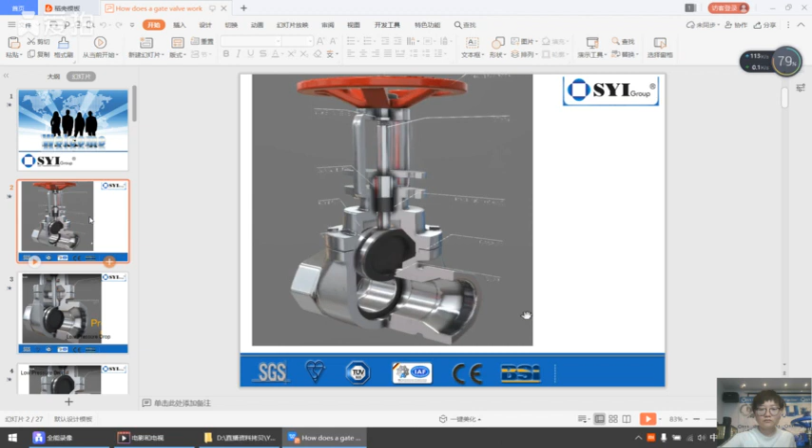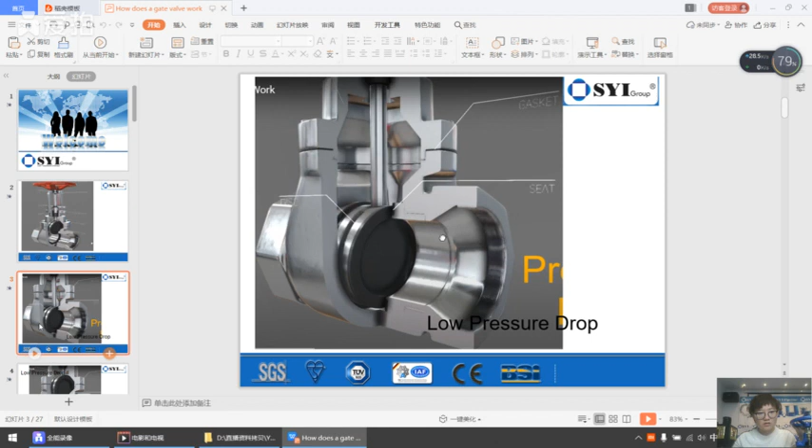We can also have a look here. This is a gate valve, and now it's in the closed position. When we move up, it is in the open position.

We can see here, when the valve is fully opened, there is little resistance to flow passing through the valve. This is very good because it means we're going to have a very low pressure drop. As the fluid or gas flows through the valve, it encounters very little resistance and will have a correspondingly low pressure drop.

Gate valves are normally used in line, meaning they're used just to pass flow through, but occasionally you might need to close the valve and isolate the system, and that is what a gate valve is for. So a gate valve is only used for open and close. This is just one function for the gate valve.

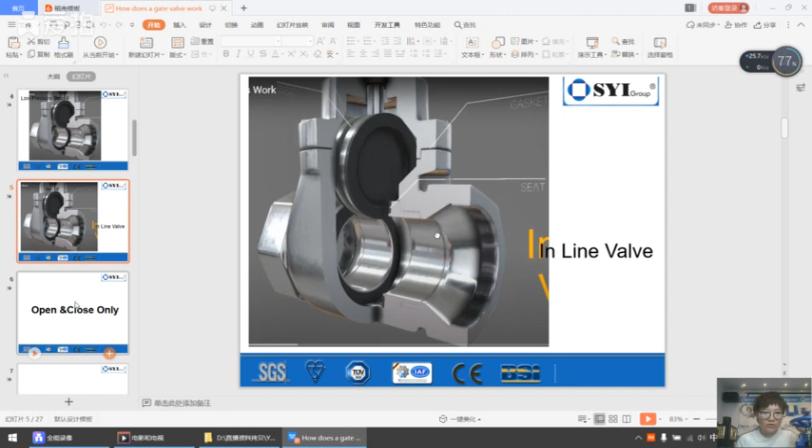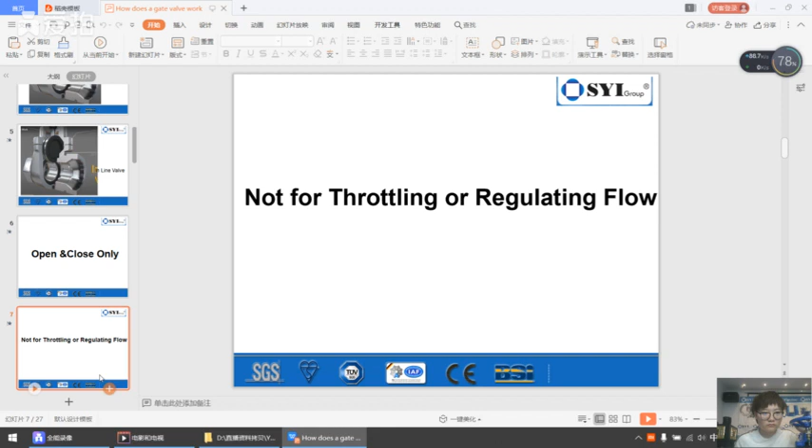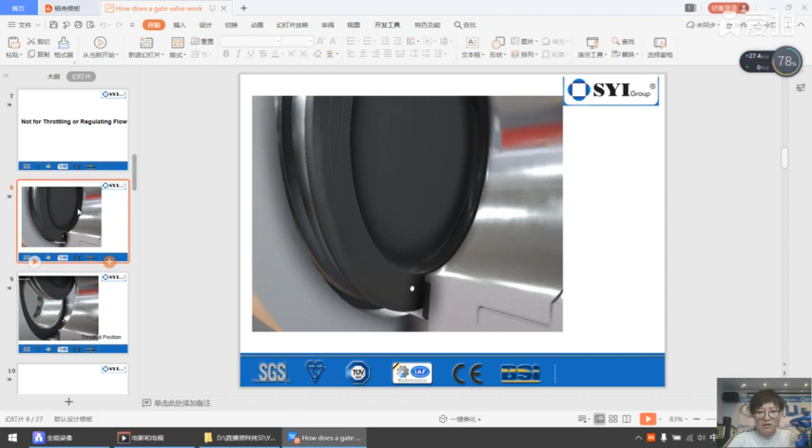It is not used for throttling or regulating the flow, and I'll show you why. Have a look here. You can see the disc is pressed against the seat. Now it's only half open, so it's in the throttled position.

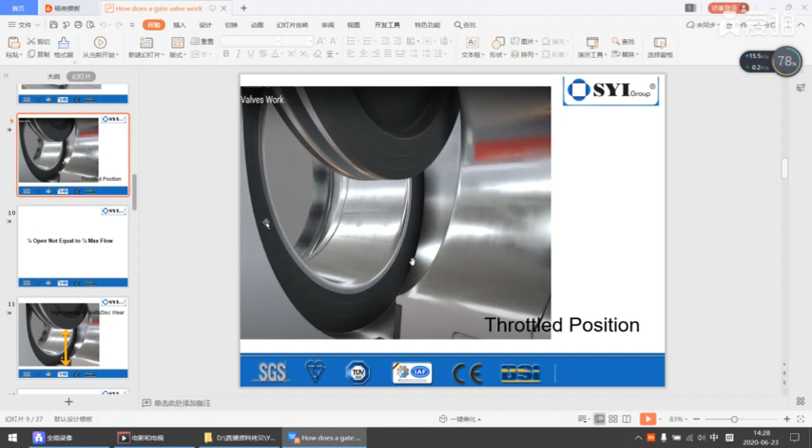The problem with this is that firstly, the amount of flow through the valve is not proportional to the amount the gate valve has traveled. So this disc section here had traveled up and it looked like approximately halfway, but the flow through the valve is not going to be half of the max flow capacity. The flow through the valve is not linear or proportional to the amount the valve is open.

This means that when you actually open the valve halfway, you're going to get a lot of flow between the disc and the body here, and this is going to be proportionally quite a large amount of flow with a high velocity. This high velocity often leads to seat and disc wear.

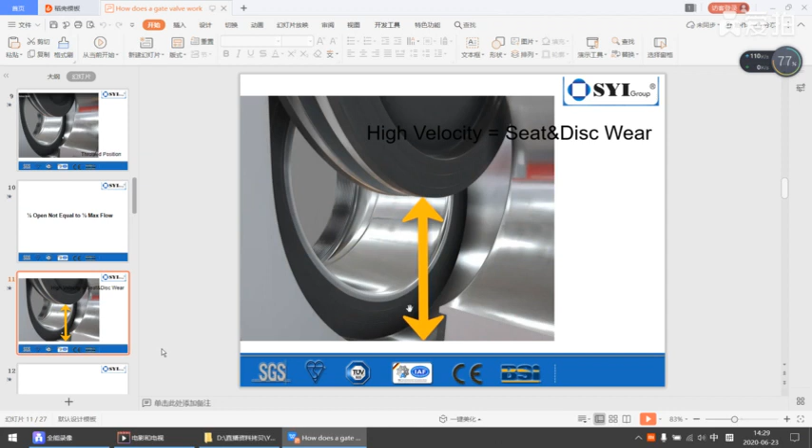The other problem from the high velocity is the turbulence. As the flow passes through this small gap between disc and body, there is a lot of turbulence, and this also creates a large pressure drop, which again is what you don't want—this is resistance to flow. So a gate valve is not very well suited to throttling; in fact, they should either be fully opened or fully closed.

We are down here, we can have a quick look at the seat. The seat, this area, is normally either part of the body, such as a flat machined surface, or a seat ring, and seat rings are usually metal rings.

The advantage with this seat ring is that if the seat becomes worn, you can just change the seat ring. So seat rings make it easier to repair a valve, such as repairing the seat if it's leaking, by simply swapping the ring out. In order for the valve to sit correctly, we need both the disc and seat to be machined flat so that they can press against each other and form a seal.

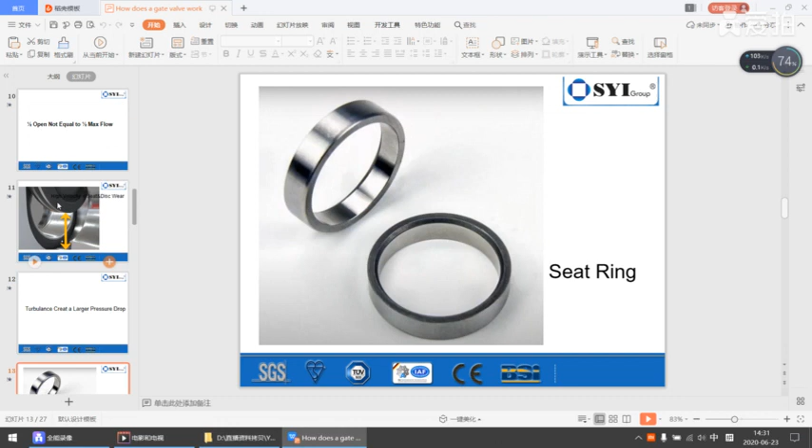So we already know that we can use seat rings and replace them if the seat surface becomes damaged, but that still leaves the disc. If we move up, we can actually see the stem passing all the way through the valve and through the sealing arrangement, and up through the hand wheel.

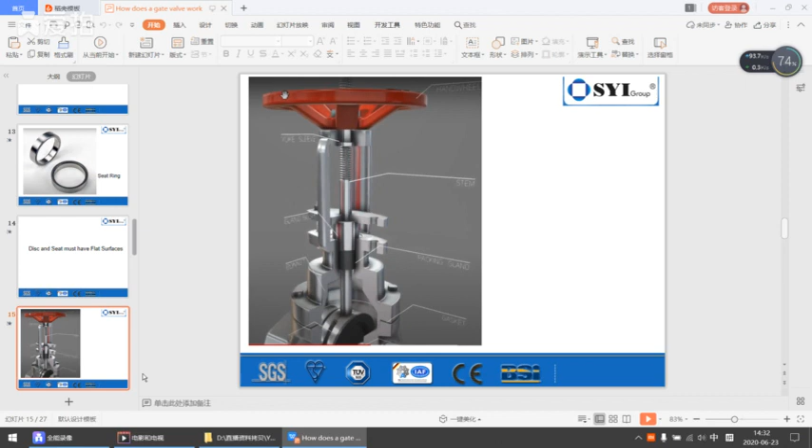This is interesting because if we watch, we can actually see the stem rising out of the top of the hand wheel and dropping back down again. So it's going to keep rising up and dropping back down.

This type of design is what we refer to as a rising stem gate valve. It makes it really easy to see the position the valve is in, because the stem is just going to pop out of the top. In order to achieve this, what we've actually done is fix the stem.

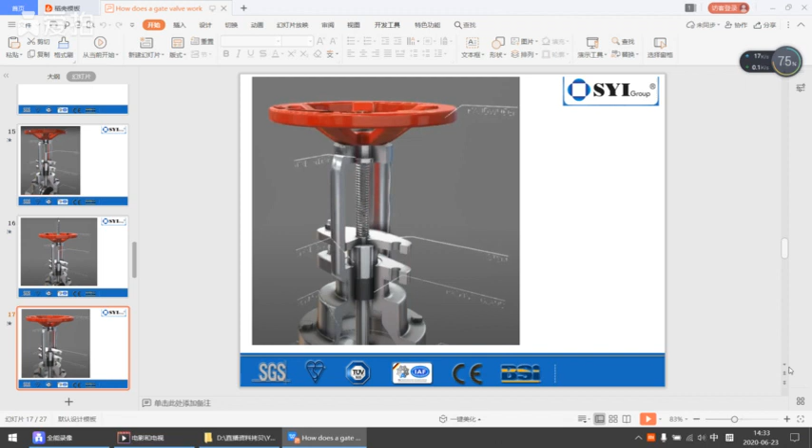That means that as we rotate the handle wheel, the stem is going to be pulled upward and it's going to pull the disc up. This is a slightly different design to what we call a non-rising stem gate valve. There are two main designs: rising stem, non-rising stem. As I said earlier, it's easy to see if the valve is open or closed.

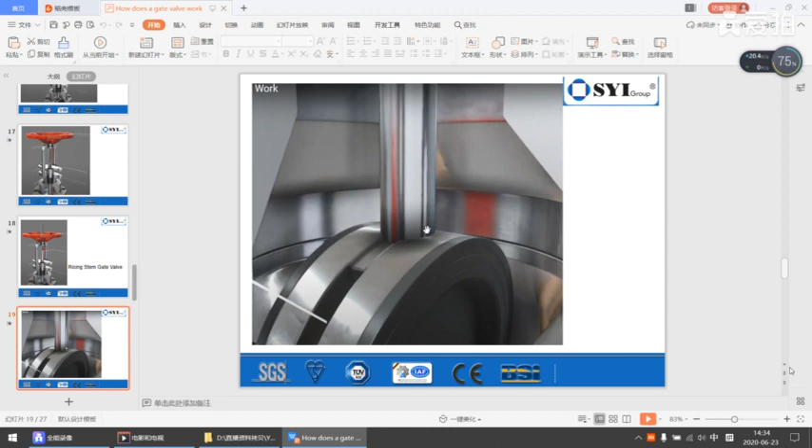The downside is that sometimes you will carry a bit of dirt on the stem, carrying out the dirty stem, and when you close the valve, the dirt will pass through the packing or potentially damage the packing, which will damage the seal, and then you may get a leak. So contamination is a potential problem with a rising stem gate valve. But the big benefit is that we can actually see visually if the valve is fully opened or fully closed.

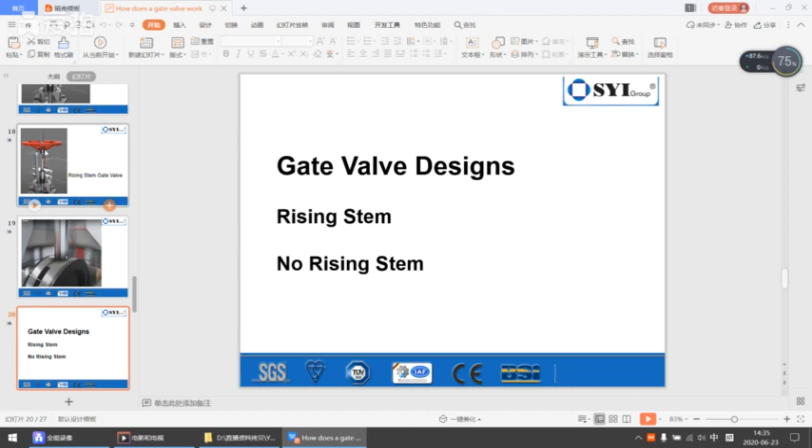If we just take a look now at a non-rising type of gate valve, you can see this is a non-rising type gate valve. I'll show you the parts. We've got the handle wheel, the bonnet, the small gaskets for sealing, the stem,

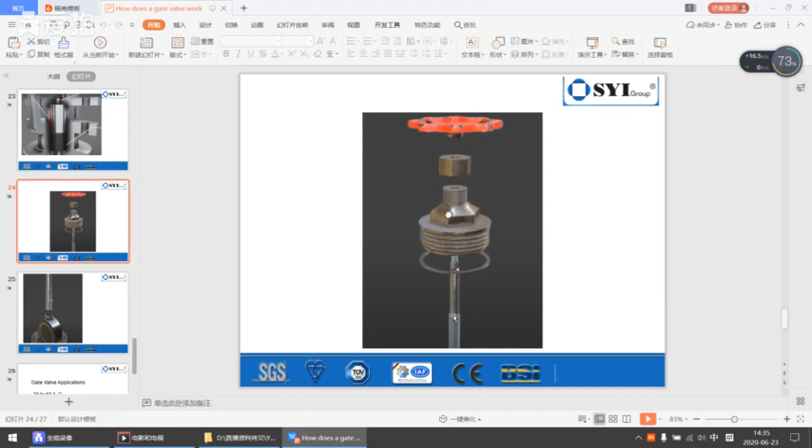and we can see the stem in comparison to the other design we looked at has a thread going all the way down. The reason we have this thread going all the way down is because as we open the valve, the thread goes through into the disc, into the section here. It's going to go all the way through the disc. As it screws into the disc, it's going to be pulled up the stem.

As it pulls up the stem, we are going to open the valve. So rather than having a rising stem, we're going to have a non-rising stem because this is just going to turn, and as it turns the disc will move from here, the bottom part of the stem, and it's going to be dragged upward until it reaches the bottom of the disc.

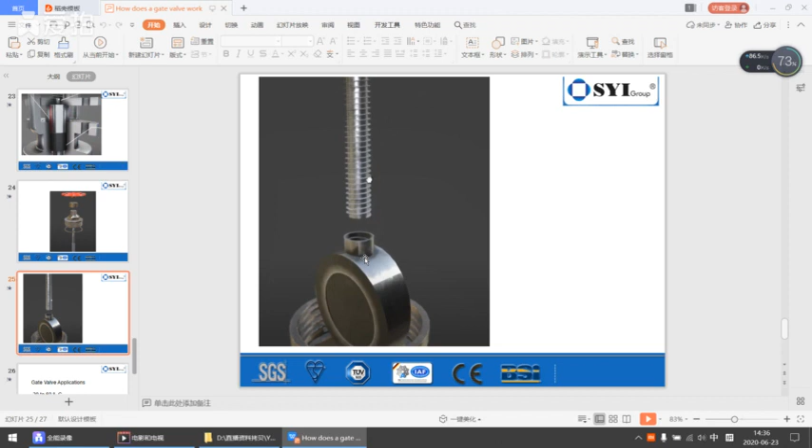The typical service temperature is going to be between about -20 to 60 degrees Celsius. Pressure up to maximally 16 bar. These valves are not suitable for very high pressure because you are actually going to blow the packing out or cause the packing to leak. So 16 bar would be the max service pressure, and for flow rates, you are looking at anything between 5 to 20 meters per second, depending on if the flow medium is liquid or gas.

For liquid, the flow rate is actually going to be less, so you are looking in the 5 meters max per second range, and for gas, you are looking up to maybe 20 meters per second. Okay, this is today's episode about how a gate valve works, and we still have 20 minutes, so let's

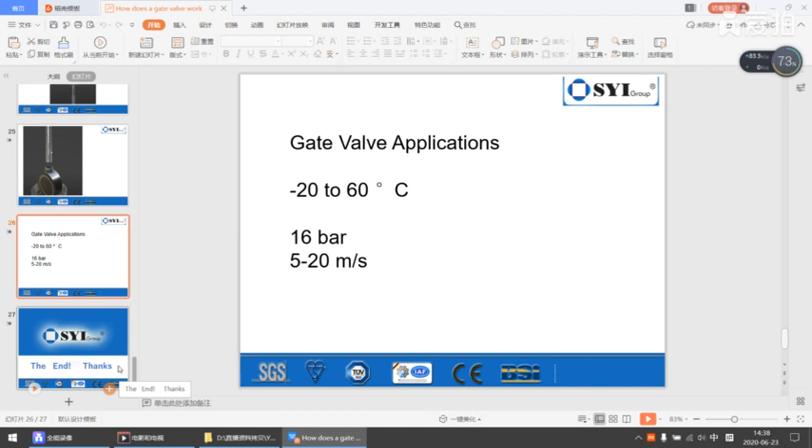Let's have a look at our catalog of valves. SYI supplies gate valves, check valves, butterfly valves, Y strainers, fire hydrants, and a full range of pipeline products and accessories.

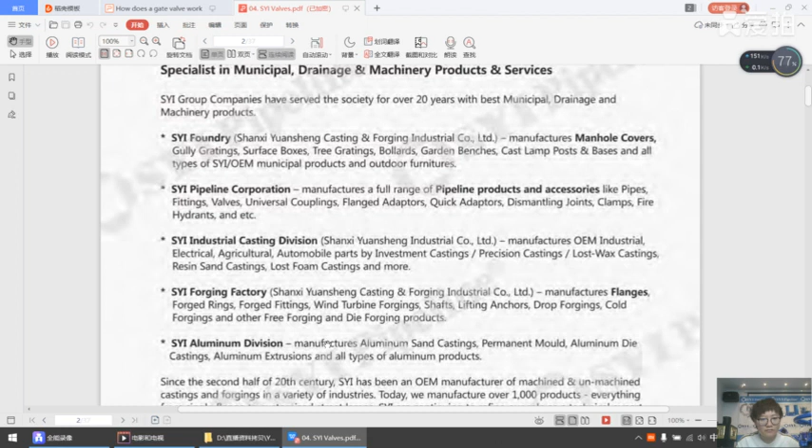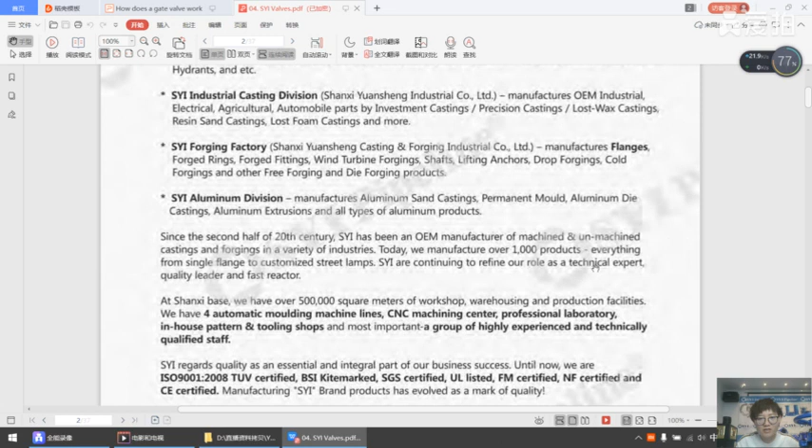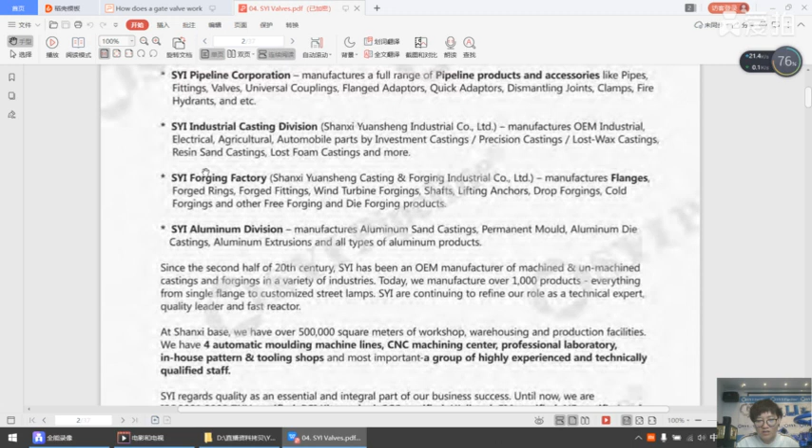We have foundries and machine plants, and over 500,000 square meters of workshop, warehouse, and production facility. You can see here we have 4 automatic molding machine lines, CNC machine centers, professional laboratory, in-house pattern tooling shops, and most importantly, a group of highly experienced and technically qualified staff. Our colleague introduced our technicians these days. If you are interested in that episode, please go back and click our link.

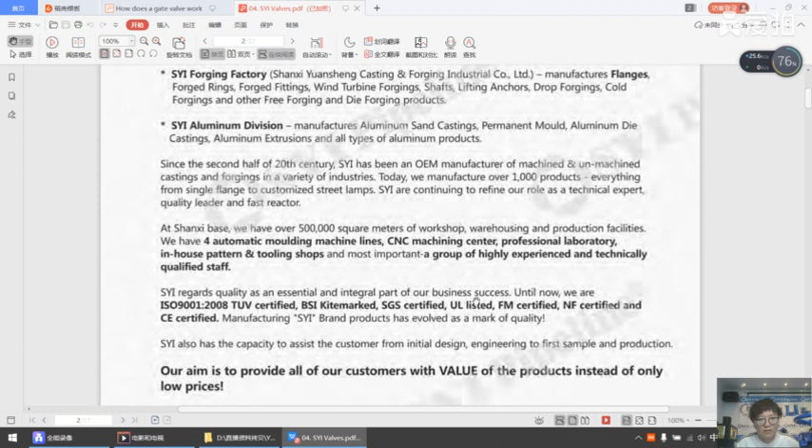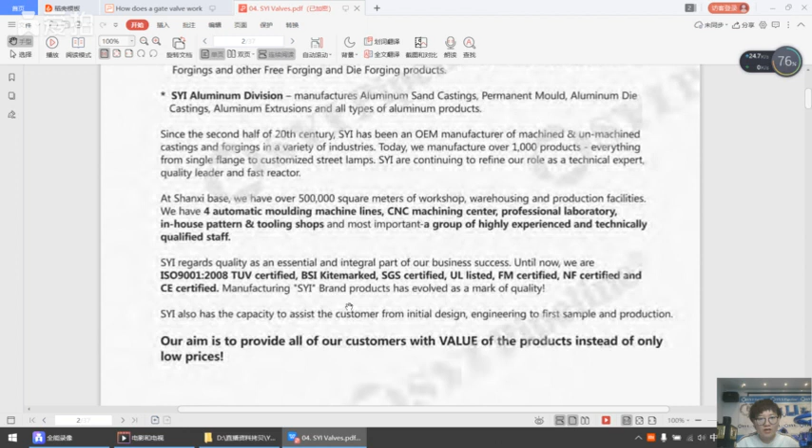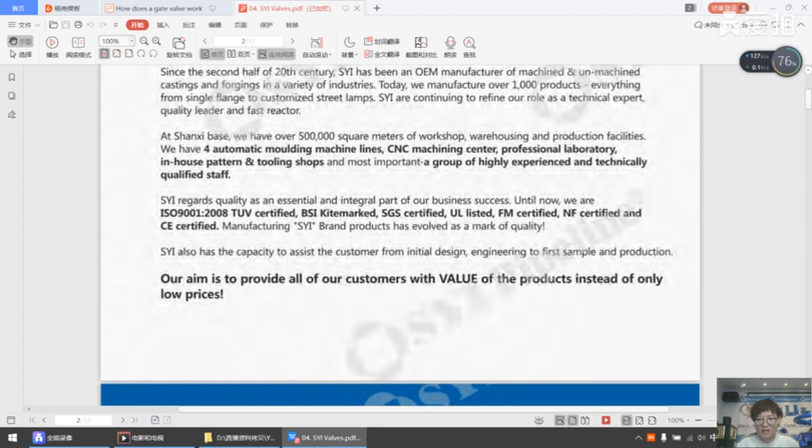Regarding quality, we have these certificates: ISO 9001, SGS certificate, Kitemark, BSI Kitemark, C and F, like that. So in SYI, we can supply one-stop service to you. This is our certificate.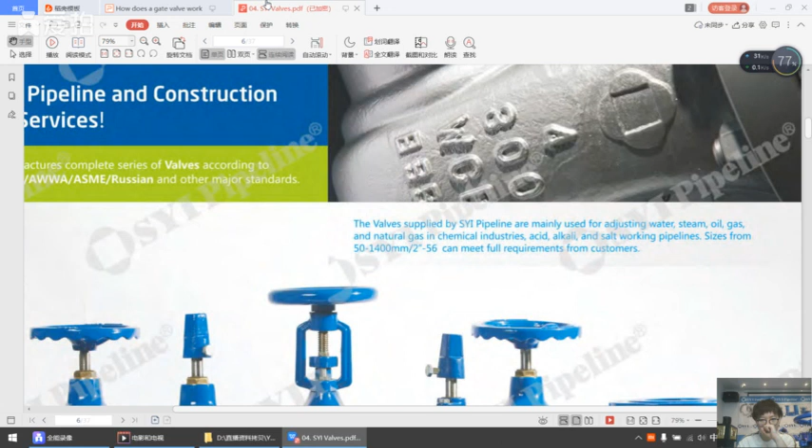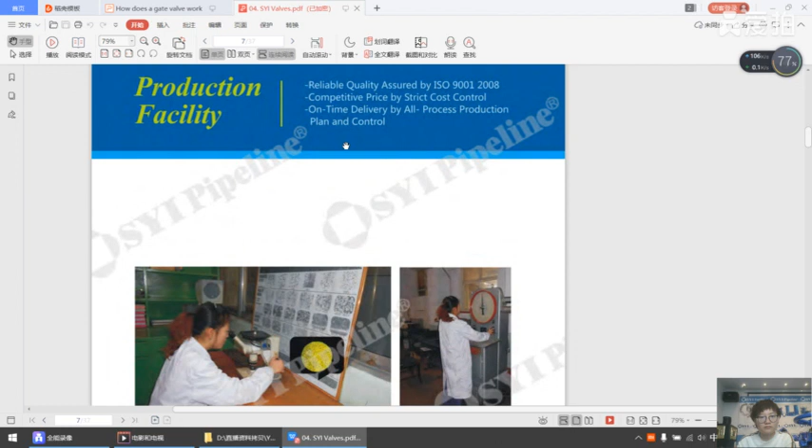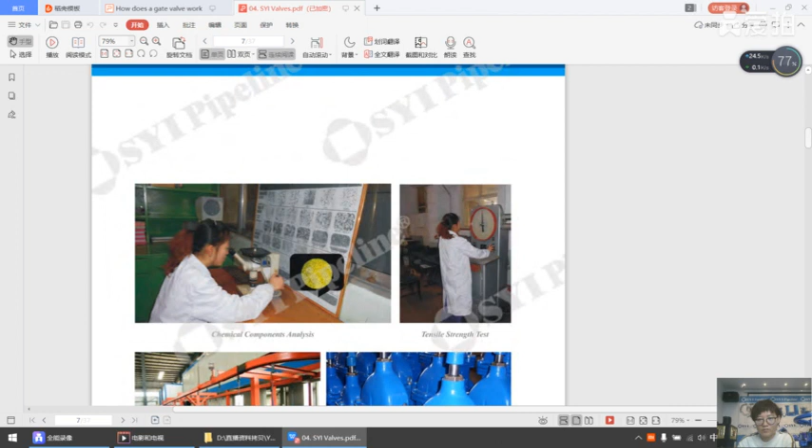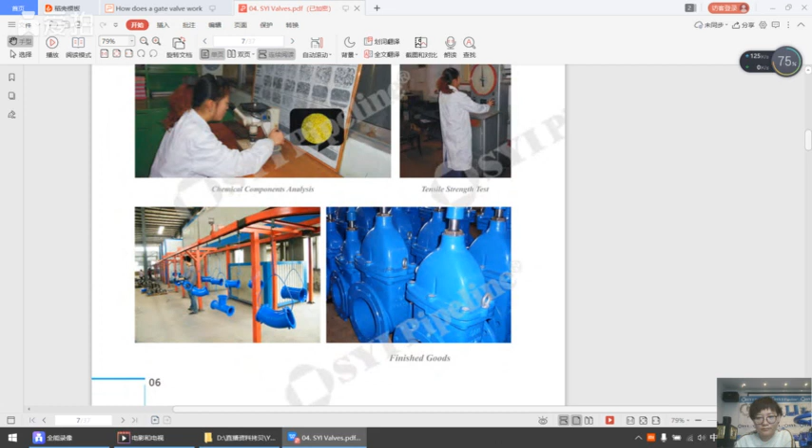This is our production facility. Because of the facility, we ensure our quality can be guaranteed. This is chemical components analysis, tensile strength test. This is you can have a look here. This is finished goods surface. It's smooth, the color is bright.

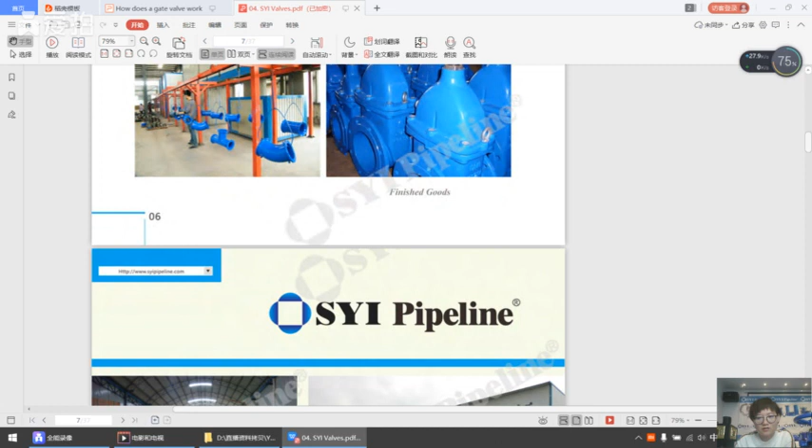This is our painting area in one of our shops. This is our workshop. This is one of our workshops.

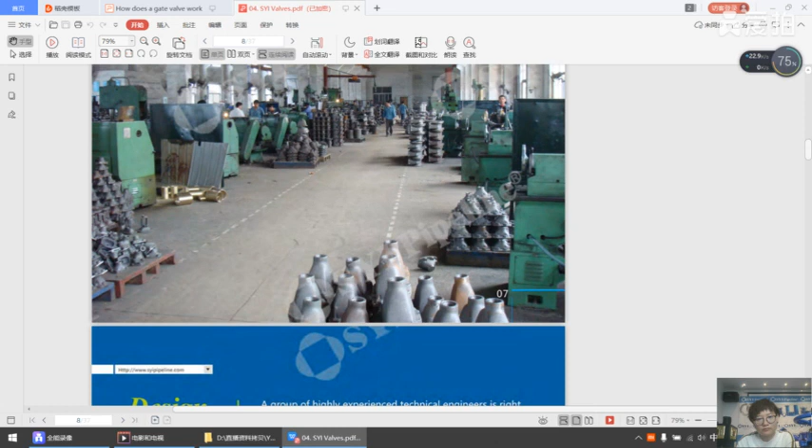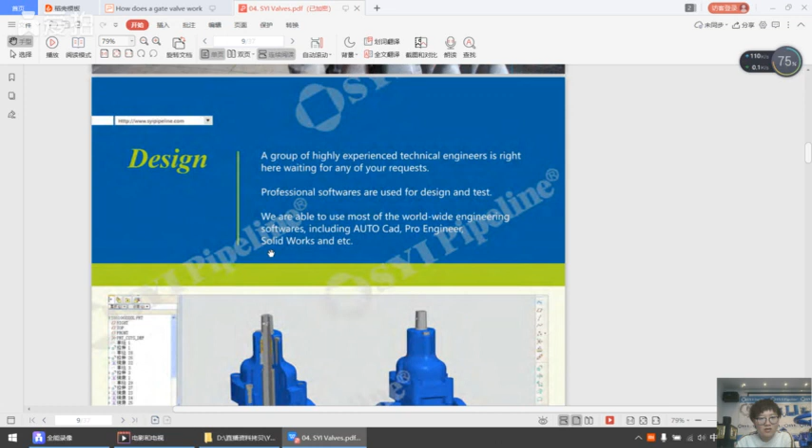Of course, we can design any valves for our clients because we have a group of highly experienced technical engineers. So we are able to use most of the worldwide engineering software to design the valve for you. So firstly, we are talking about the gate valve.

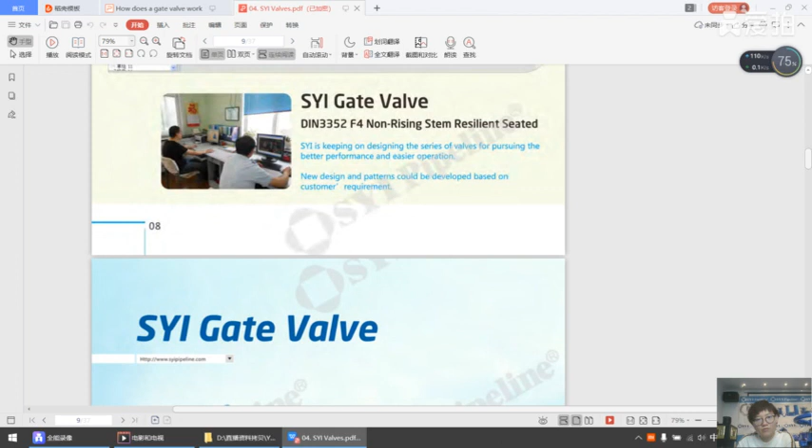This is the non-rising stem resilient seated gate valve. It's the most common gate valve. This is rising stem resilient seated gate valve.

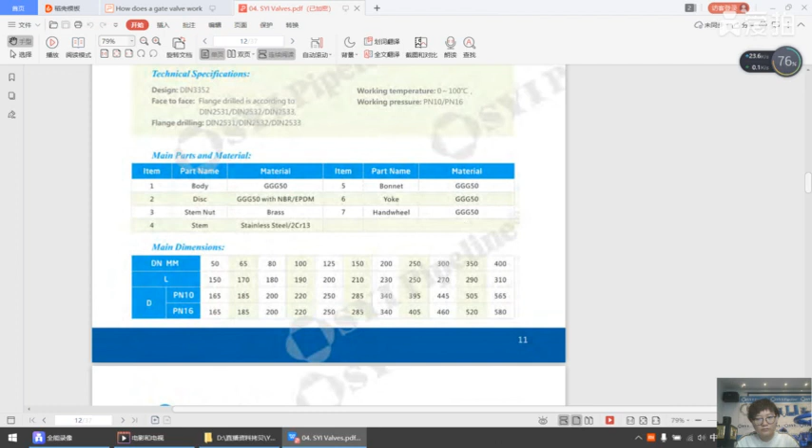This material is ductile iron GGG50. Disc is the same, bonnet the same. Also we can supply the material of carbon steel, stainless steel. This is a rising stem metal seated gate valve. Here the seat, disc and the seat here are made of metal. On a resilient seat gate valve, the disc and the body here, seat here, are made of rubber.

Have a look at this sample. This is a resilient seated gate valve. Have a look here, the disc outside is made of rubber. So this is resilient seated gate valve.

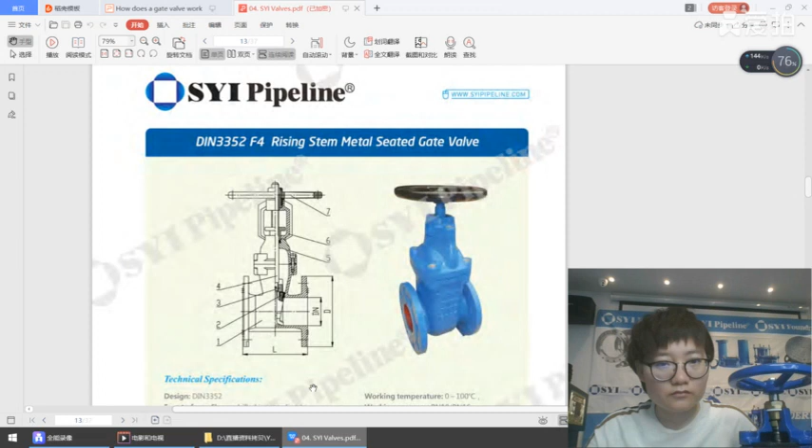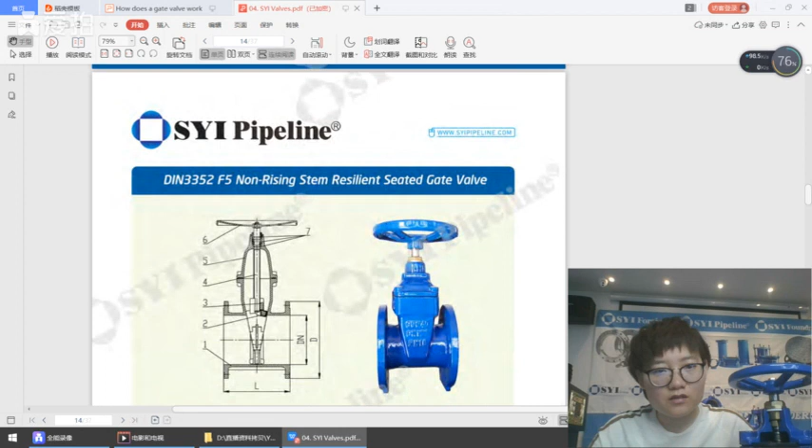And another type is a metal seated gate valve. This is an F5 non-rising resilient seated gate valve. So this sample is non-rising stem gate valve, because when we open and close the valve, we cannot see if the valve is opening or closing. But if it's a rising stem gate valve, you can actually visually see when the gate valve is open and when the gate valve is closed. So it's a different design.

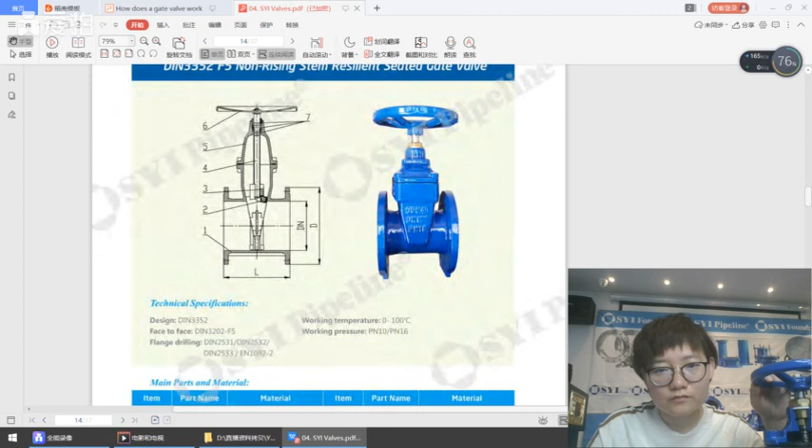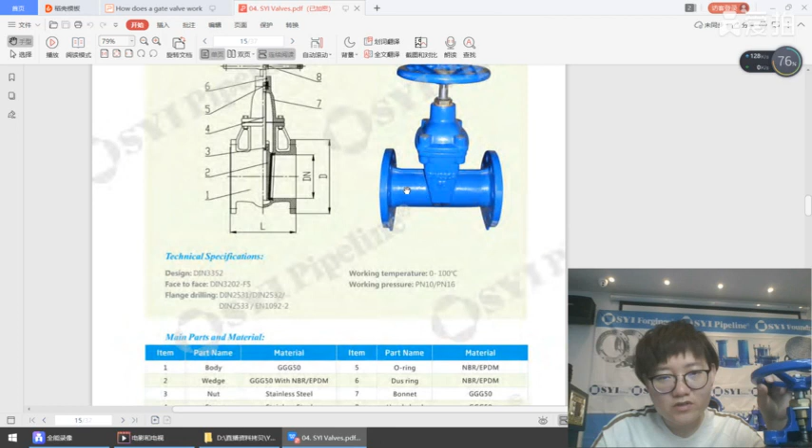Let's go on. It's non-rising stem resilient seated gate valve, F5. And the difference between F4 and F5 is this length. For F4, the length L is shorter than F5.

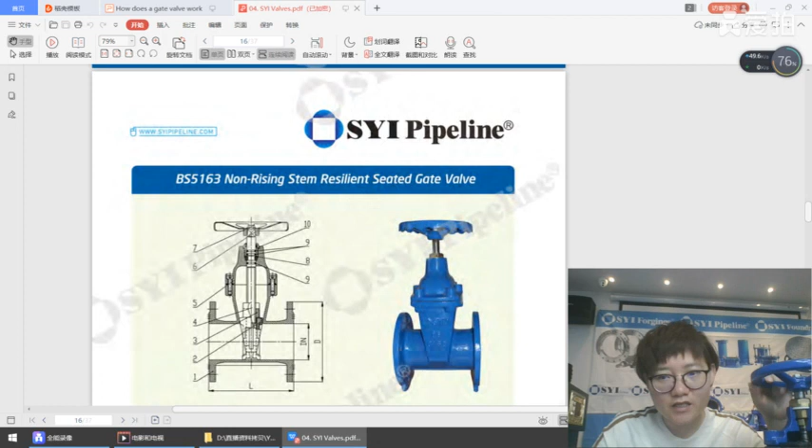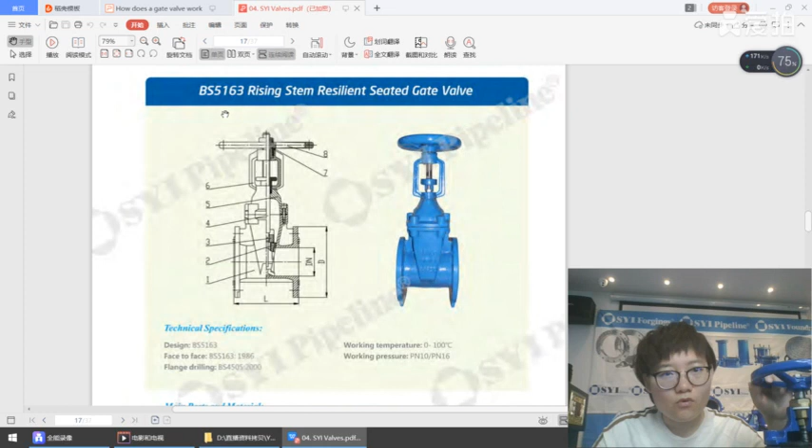This is the British Standard BS5163 non-rising stem resilient seated gate valve. This is the BS5163 rising stem resilient seated gate valve.

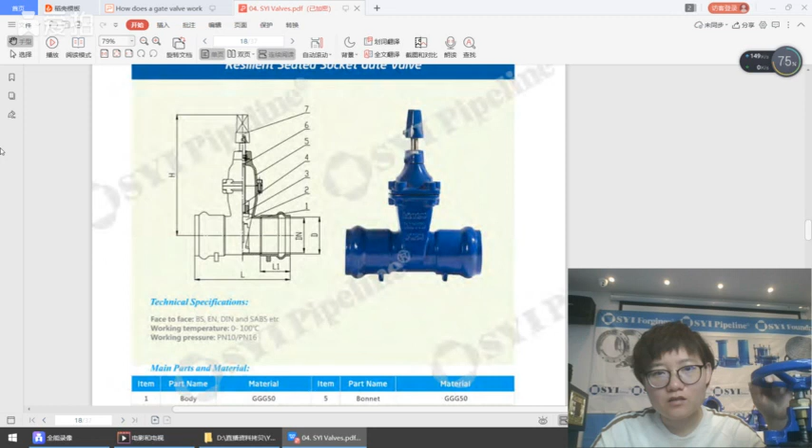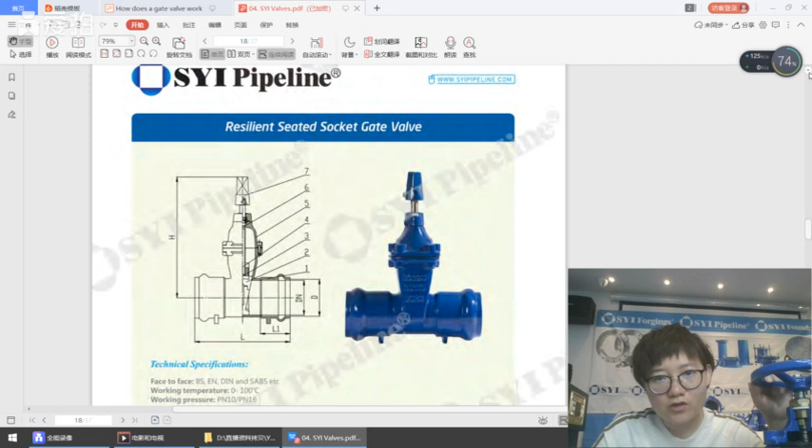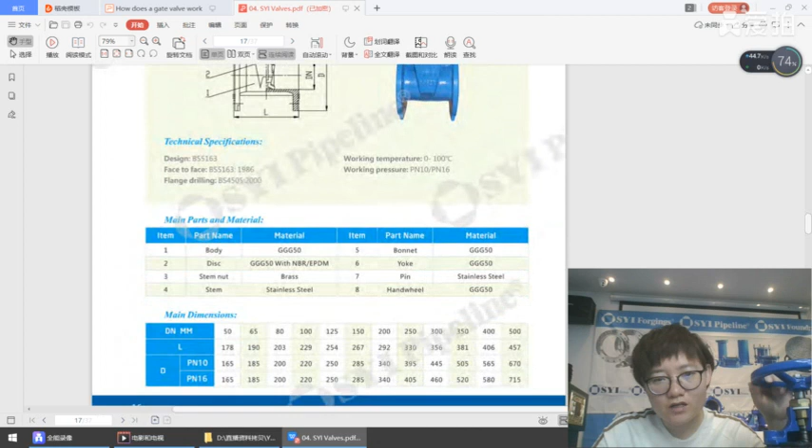And this is special because this resilient seated socket gate valve is connecting socket joint pipes. For previous valves they are connecting flange joint pipes. You can see here it's connecting flange, but for this gate valve it's connecting socket pipes, socket and spigot pipe.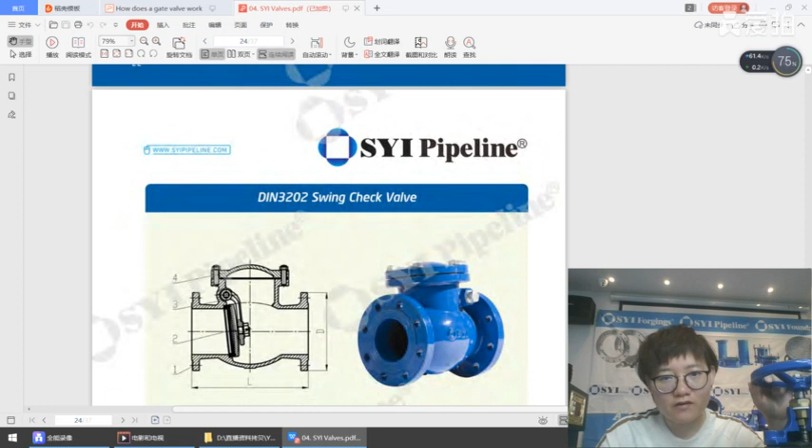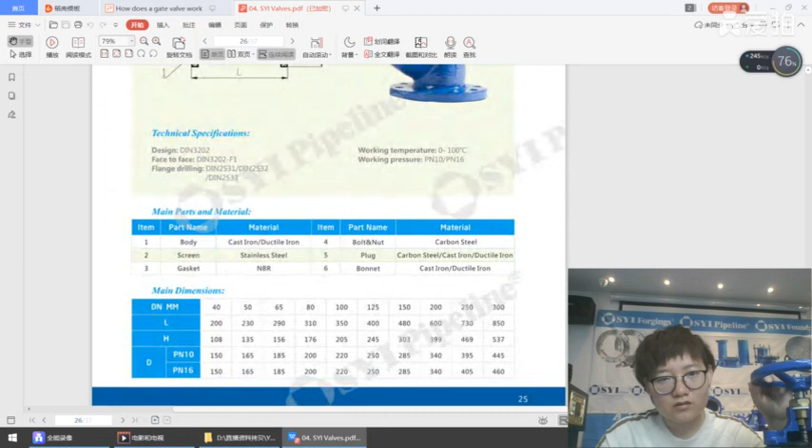It is swing check valve. This is a strainer, Y strainer, and we can supply different standard Y strainers, and this is a fire hydrant. This is underground fire hydrant.

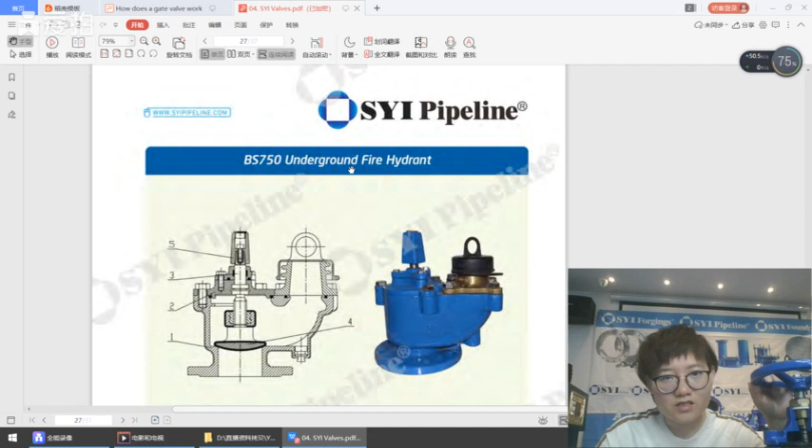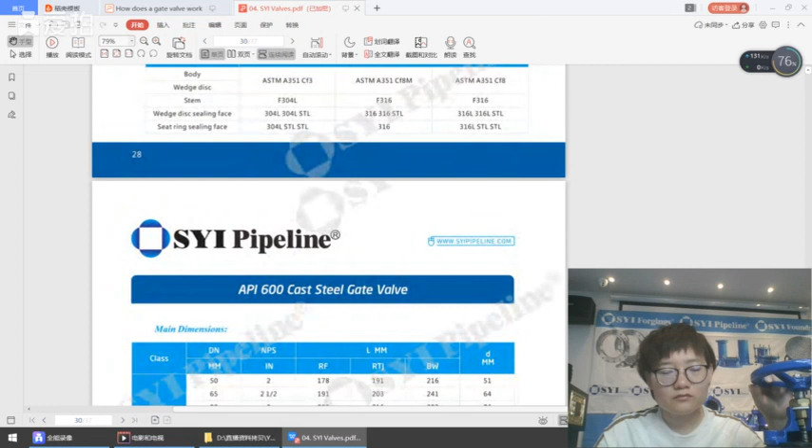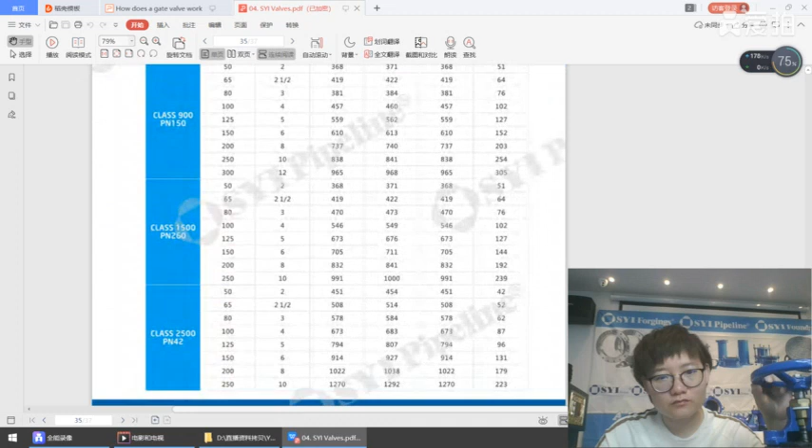So our valve catalog covers different standard gate valves, butterfly valves, swing check valves, and Y strainer fire hydrants. If you are interested in our valves, please contact our sales representative. This is our contact information.